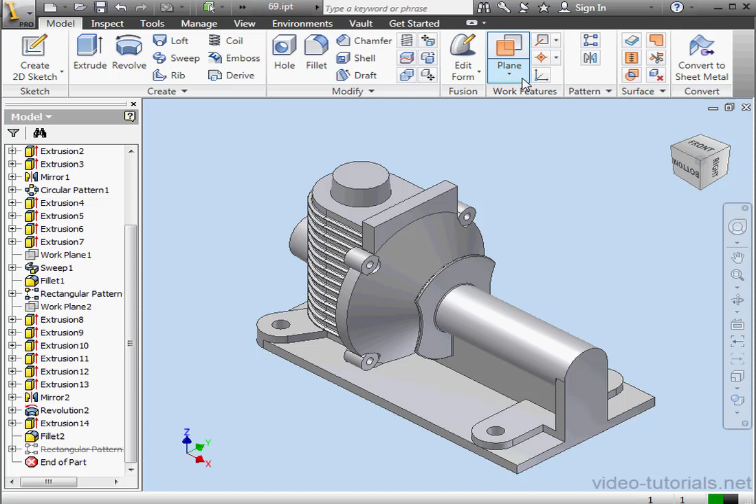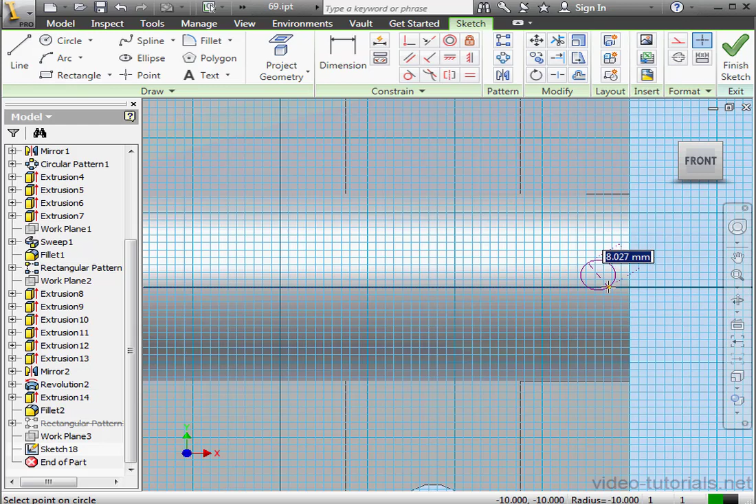Let's begin by inserting a support plane. I'll select this face and this face. Now right-click on Work Plane 3, New Sketch, and let's hide the plane. Right-click, Visibility. Okay, here I'll create 2 circles. And the second circle about here. Escape to exit the tool.

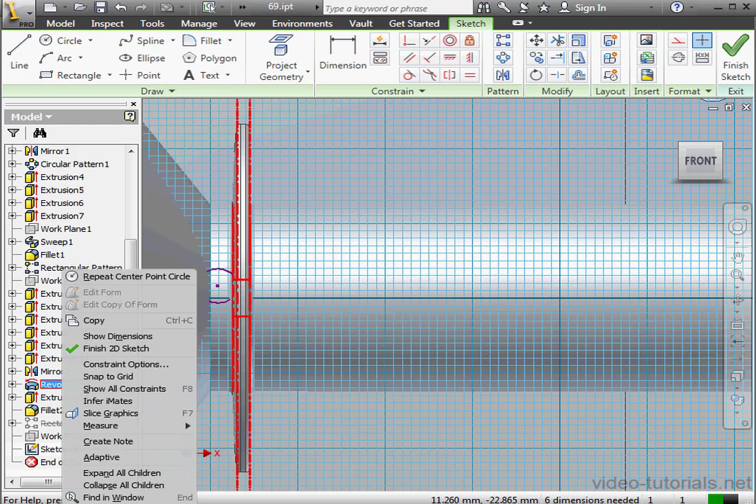I didn't suppress Revolution 2. Since I'm in the sketch now, I'm not able to do so. Let's try right-clicking on Revolution 2. As you can see, the Suppress Features option is not available right now. Well, let's change to Wireframe Visual Style. That'll help us sketch. And let's apply some constraints.

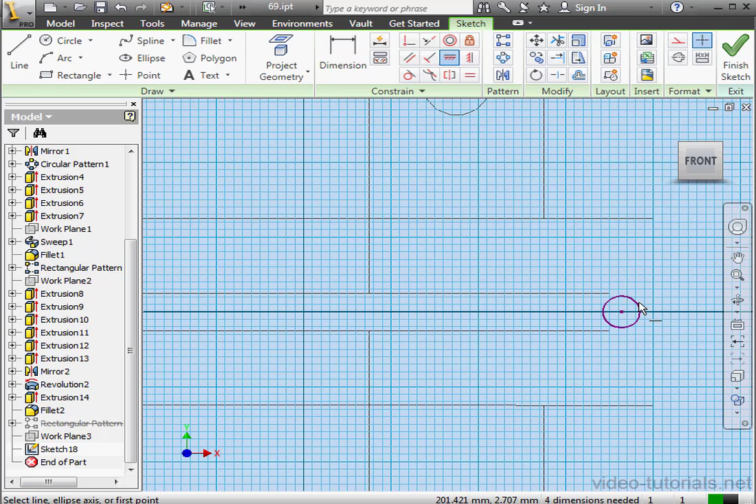A horizontal constraint between this point and the center point of the circle. And this circle as well. Now an equal constraint between the 2 circles. Let's dimension the diameter of one of the circles. 15 millimeters. Okay.

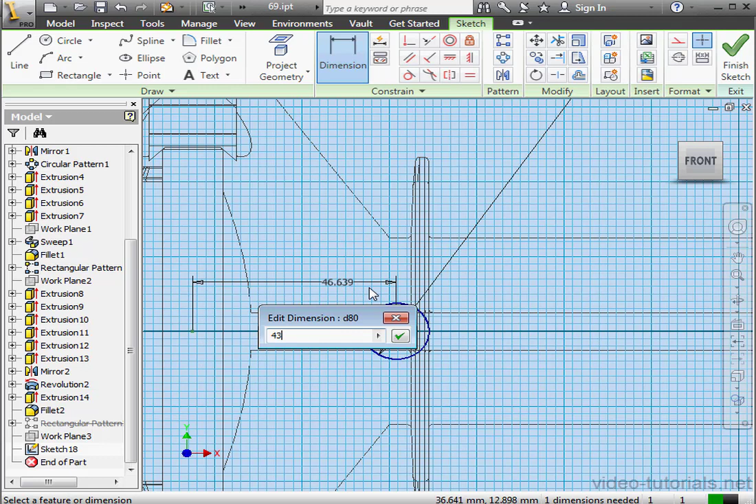And let's dimension this distance, 43 millimeters. Okay. This distance here, 10 millimeters. By the way, notice that when I apply dimensions, Inventor automatically projects lines from this edge. Our sketch is fully constrained, so let's click Finish Sketch.

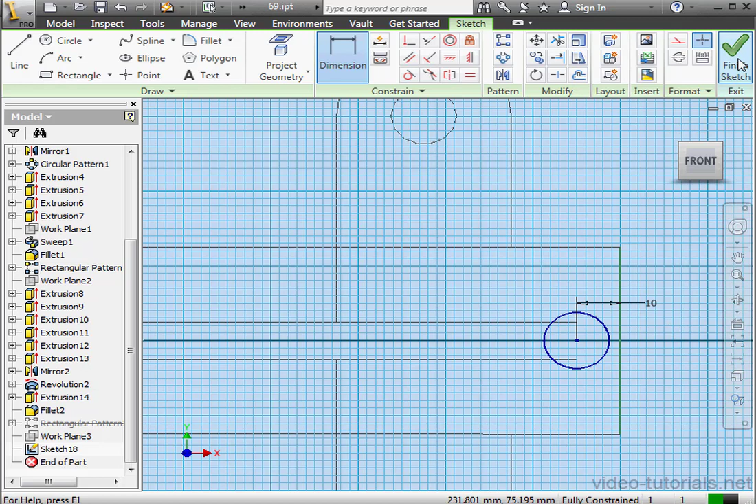Let's take a home view, and we're ready to activate the Extrude command. I'm going to select both profiles. Let's take a right view. Now I'm going to extrude 5 millimeters in both directions. And again, if I use the symmetrical extrusion in both directions, I'm only able to choose one taper angle from the More tab. Let's enter a value of -5 degrees. And you see how Inventor tapers inward on both sides, so this option isn't going to work for us.

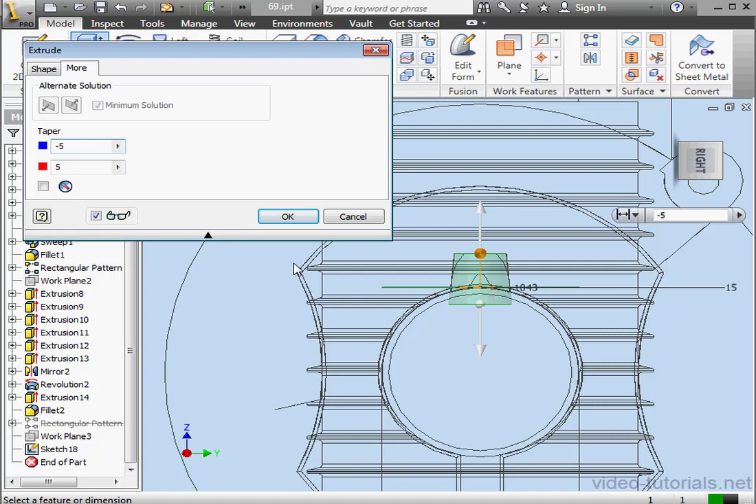We'll have to use the asymmetric mode. Let's go back to the More tab. Now we can set 2 different taper values. +5 degrees for the second direction. Let's go back to the Shape tab. Change our extrusion depth to 5 millimeters and click OK. Okay, let's take a home view. Just zoom in a bit too.

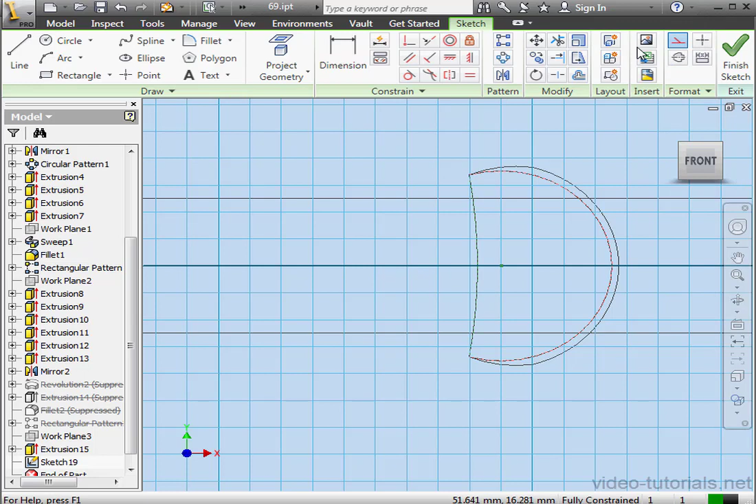Since we have now finished our sketch, we're able to suppress Revolution 2. So let's do that. Makes it a bit easier to sketch. And let's insert a sketch on this face. What I want to do here is cut small segments right from here. Let's convert this line to construction geometry. Activate the Circle command. Snap to the center. And escape to exit the tool. Let's finish the sketch.

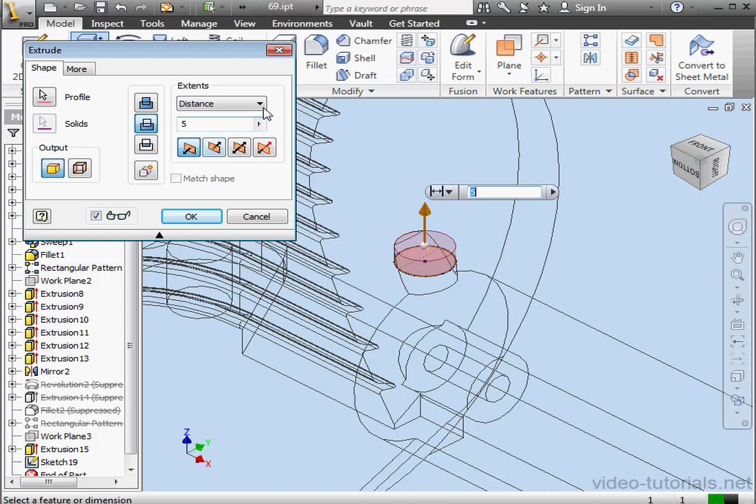Activate the Extrude command. Our profile is pre-selected. Let's use the Cut mode. Reverse the direction. Extents, we'll use All. And let's click OK. All right, let's insert a sketch on this face.

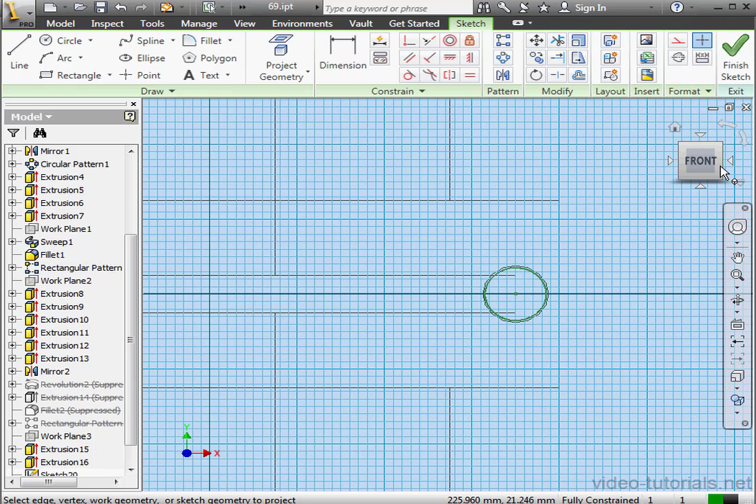Right-click, New Sketch. In this sketch, I basically need one thing, this point. I need it available so I can snap to it. Let's click on Project Geometry and select our circle. Now let's click Finish Sketch. Activate the Hole command now. Under Placement, From Sketch is selected.

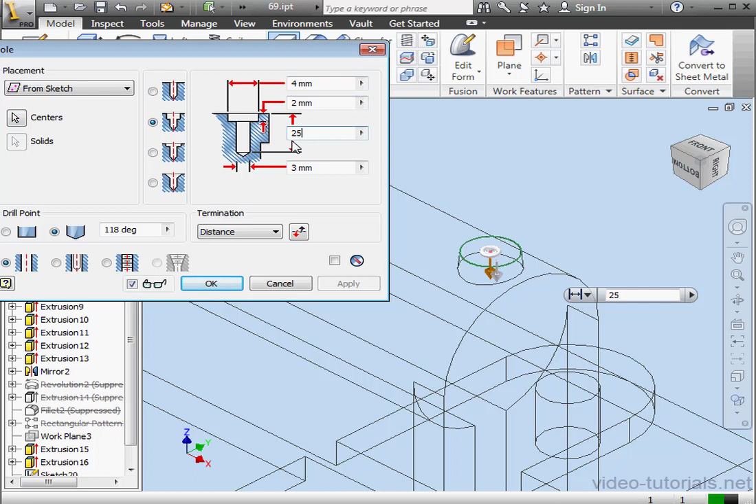Let's select this point and this point for our second hole here. From the hole type options, let's use a counter bore hole. We look at the hole command in more detail in the advanced segment of this video course. I'm going to leave everything at default except the depth, which I need at 25 millimeters. Let's click OK.

All right, let's bring back our suppressed features just to make sure we don't have any problems. And let's take a home view. Everything seems to work fine so far. This concludes Lesson 8. Just a little bit more to go.